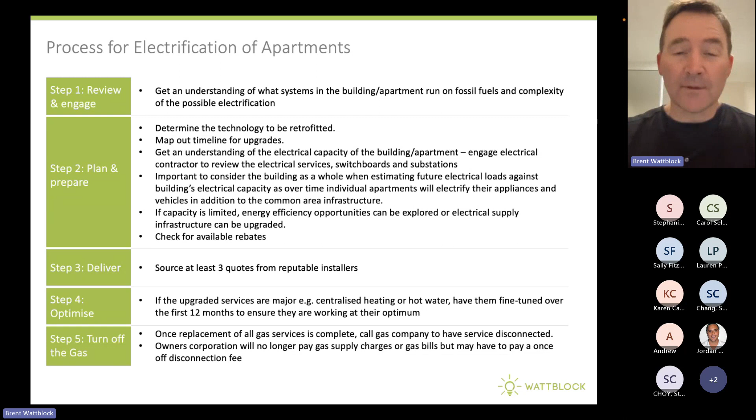So when it comes to delivery, you want 3 quotes from reputable installers. After you've installed the new technology that will reduce your gas or fossil fuel reliance, you have an optimization process - we'll come back to that, a bit of a fine-tuning process - and then finally turning off gas and disconnecting gas, either from your own apartment or, in the best example, from the entire apartment building.

One of the things we just have to understand as we embark on this journey is the difference between individual lot property and common property. Here's a diagram we've reused from Bannerman's Lawyers, a North Sydney-based strata law firm. It gives an indication as to what items are individual lot property and what are common property, and probably the one that's most confusing when we try to electrify our apartment buildings is hot water.

Hot water could be a centralized service which can't be upgraded by the individual apartment owner on their own. But in some townhouses or older apartment buildings from the 60s or 70s, you might have your own hot water service or hot water tank for your own apartment or lot. So you can fully embrace decarbonisation and electrification in those buildings.

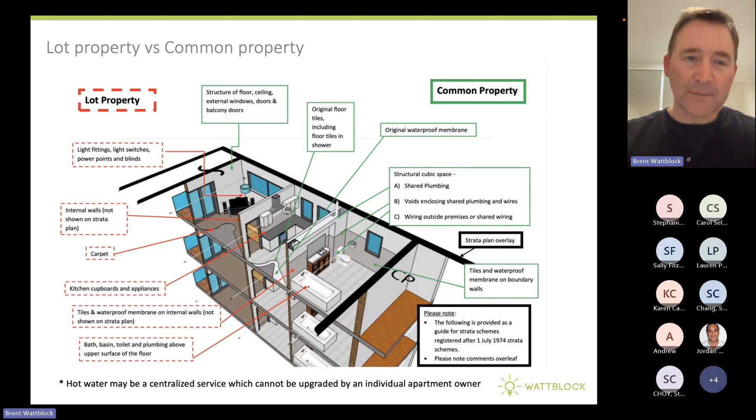So the first thing is to understand, for your own building, the difference between individual lot property and common property. And if you're in a more modern apartment building, find out whether you've got a hot water meter - that would give you an indication as to whether you've got a centralised hot water service and whether the hot water is individually metered.

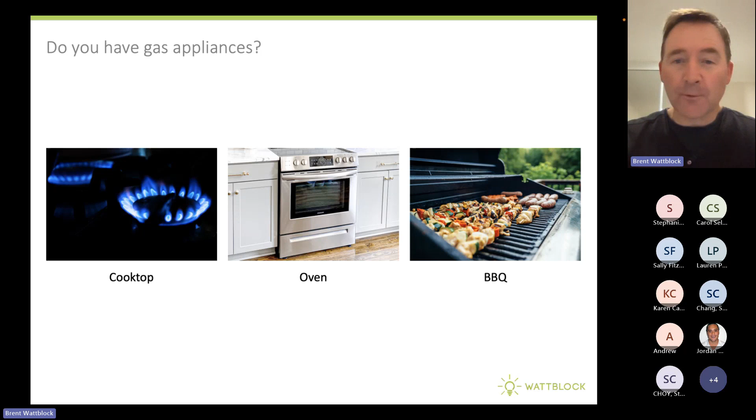Now the next thing: inside our apartment, do we have gas appliances? Do we have gas cooktops? Do we have gas ovens? Do we have bayonets on our balconies where we're connecting up gas barbecues? So the first thing is an audit of your internal apartment - we've got to find out where these gas items are. And probably the one that is of most interest, and people have the most control over, is moving to an induction cooktop.

Now, there's a wide range of induction cooktops that you can install into your apartment building. They can range from $600 to $2,200, but maybe there's a luxury model that's even $8,000. Now the thing you've just got to be cognizant of if you're moving to an induction cooktop is the amperage that is used by the induction cooktop.

That could be somewhere in the range of 20 amps to 48 amps. In some apartment buildings in the North Sydney area, we've actually come across some really old apartments that have a limit of like 16 amps for the entire apartment. In those buildings, at the moment, until a supply upgrade is done to the building, you wouldn't be able to retrofit even a normal electric cooktop, let alone an induction cooktop.

But in other buildings that are a bit more modern, you might have a 63 amp single phase meter for your apartment, and you could comfortably handle a 20 amp induction cooktop.

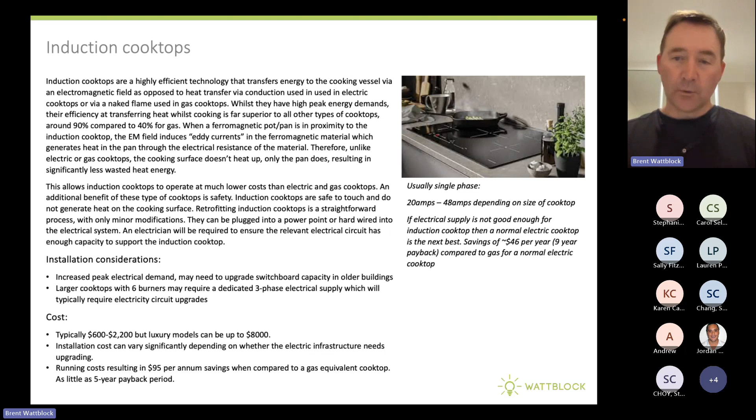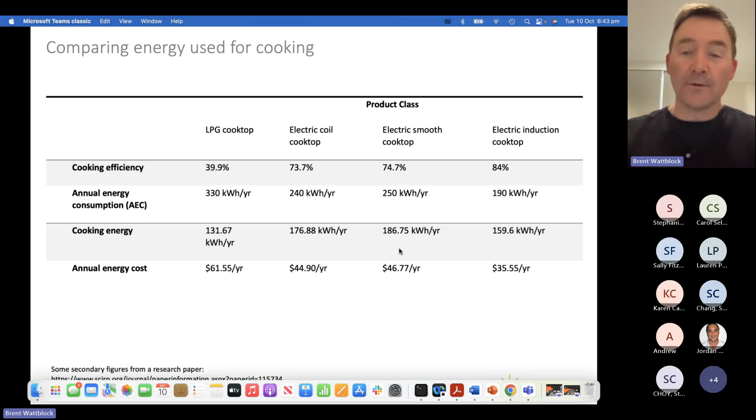So just to give you a little bit more detail on the savings you might get and the relative efficiency of different cooktops: on one end we've got LPG at 39.9% efficient. As we move through, electric coil cooktops are 73.7%, electric smooth cooktop is 74%, and then the best efficiency is electric induction cooktop. You can do all your cooking for an entire year for about $35 with one of those.

Now the next thing is, do you have gas heating or not? The presence of a gas bayonet, say on the inside of the apartment somewhere, is the indicator of whether you actually have the ability to use a gas heater today or not. Not every apartment has a gas bayonet - in fact, some of our older buildings don't have gas connected to the individual apartments at all. But probably the buildings built from the 1990s onwards, at least until about five years ago, a lot of those have gas bayonets, and people have the option of doing gas heating.

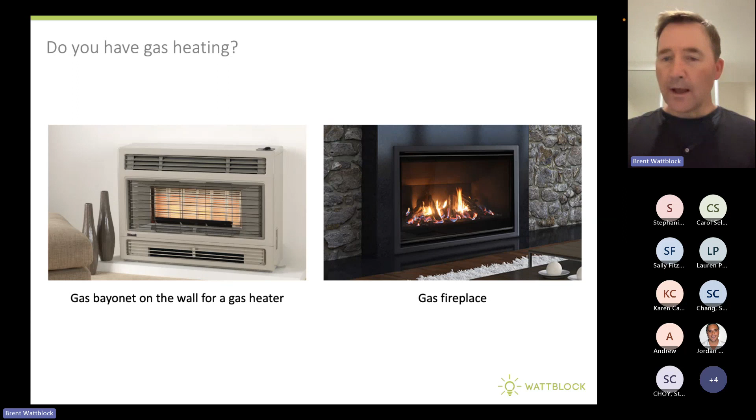Now the thing we want to bring out tonight is that reverse cycle air conditioning is the electrified method of heating your apartment. While reverse cycle air conditioners use electricity, they're actually a very efficient way to heat an apartment. So if you were someone that had a gas heater and you were using a gas bayonet, it's actually more efficient to get rid of that gas heater and install a reverse cycle air conditioner, using the heating mode to heat your apartment - that's because reverse cycle air conditioners are a form of heat pump.

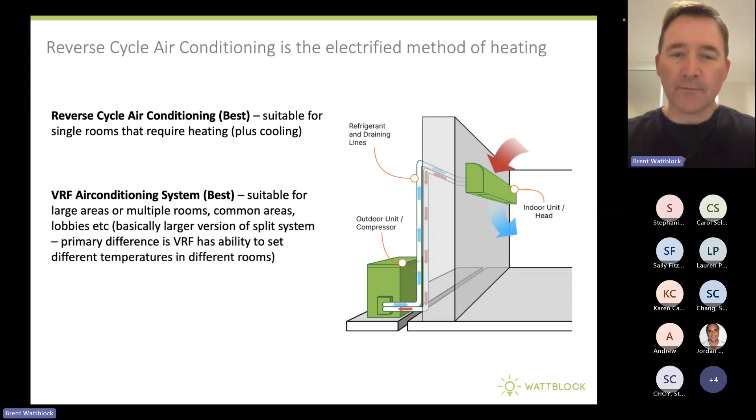And we'll come back and talk a bit more about heat pumps later on. Now, the next thing as we're auditing our apartments is, do you have gas hot water for your individual apartment that is just dedicated to your own unit?

To find this out, you might see one of these instant gas systems strapped to the side of the building, typically outside one of the windows of your apartment, or potentially on your balcony. Or if you're a ground floor apartment or more of a townhouse complex, you might find your gas hot water storage tank at ground level.

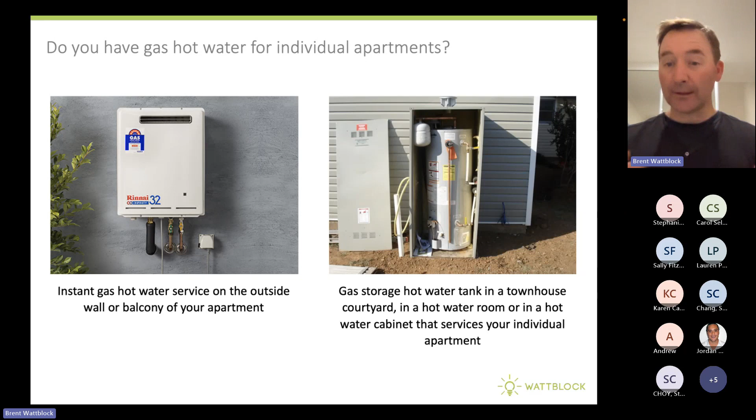The heat pump and the reverse cycle air conditioner are efficient, and they are the electrified version that we want to be moving to in the future as we electrify our apartment buildings.

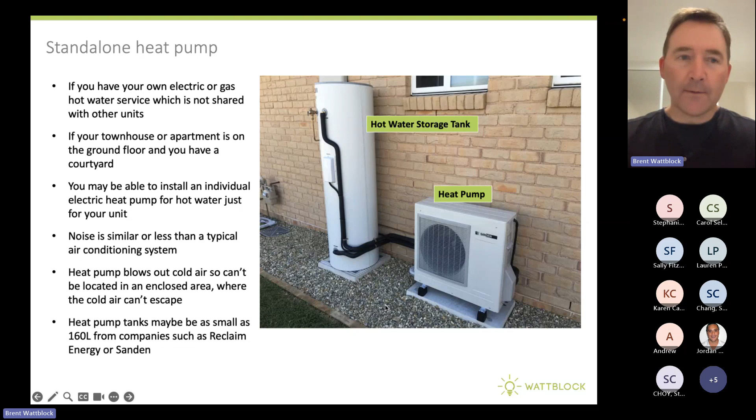Now, if you have this standalone hot water setup, you're in a townhouse or another older apartment building that has a ventilated hot water system, or a hot water system that you can ventilate. Maybe it's in a stairwell that's not inside your own apartment, or not underneath the sink or in an enclosed cabinet. These are some of the savings that you can actually get.

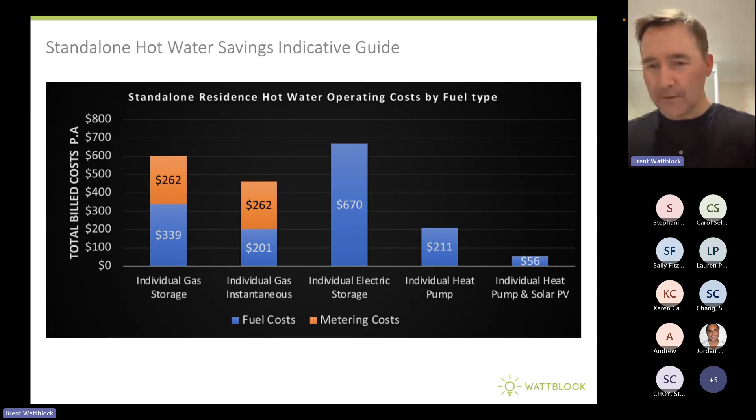You can see the individual heat pump is much more efficient just on its own because it's using the ambient air temperature, sucking that in, and you're getting free heating of the hot water just from the heat island effect of North Sydney. And also, you're not paying daily connection fees to the gas distribution network. So you're saving on metering costs, and you're also saving on the energy that's used to heat the water.

So we want, if we've got common hot water systems that are gas today, we want those to move to electric heat pumps. We want pools that are heated by gas heating systems today to be moved to electric heat pumps. We want to get the solar panels onto the roof. We want to get the batteries into the building.

And of course, another fossil fuel is the petrol that's going into our internal combustion engine vehicles. And we want to be upgrading that as we upgrade our cars, so that we move to using electric vehicles, and we have EV charging in our apartment buildings that allows us to charge the electric vehicles.

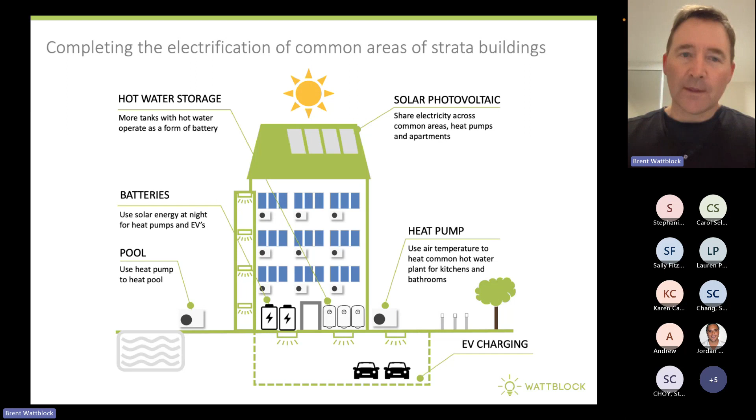Just to compare that with our standalone houses, they're at about 37% penetration at this point in time. So you can see that strata's still got a long way to go to catch up and electrify when it comes to the head start that standalone houses have. But batteries are still fairly early, heat pumps still fairly early in the piece when it comes to our apartment buildings, but we're going to see more of them coming into the market over the coming decade.

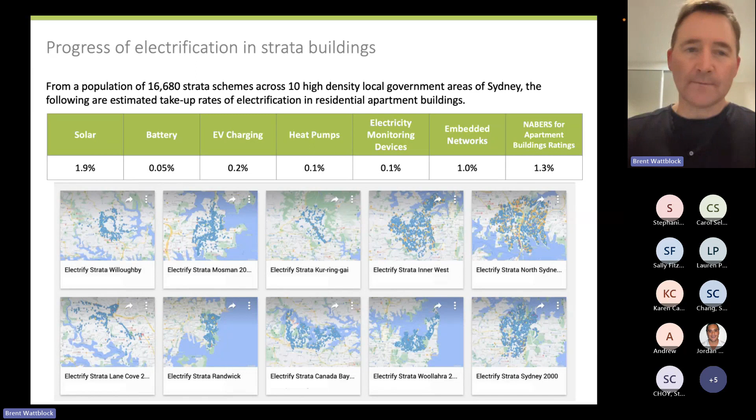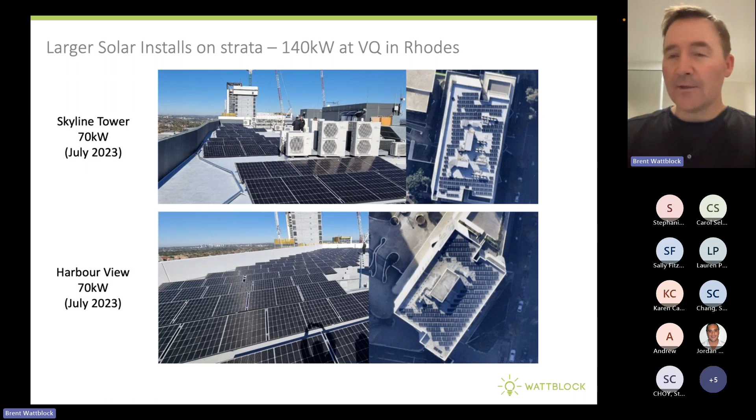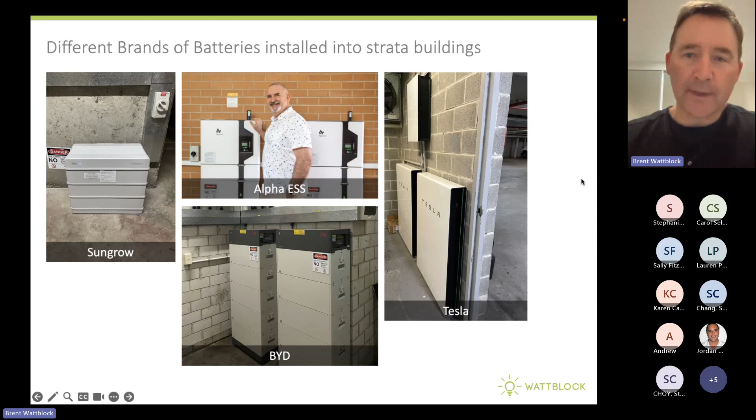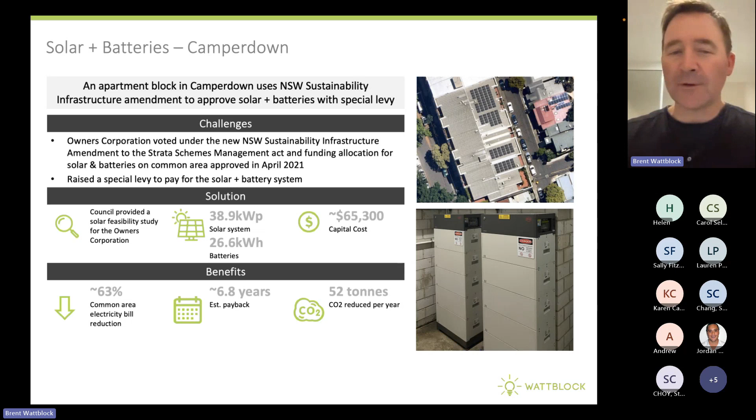Here's a case study from Camperdown, and what's interesting about the electrification journey of this particular strata scheme is how they financed doing solar and batteries for their apartment building. They actually went out and raised a special levy to finance a 38 kilowatt solar system with 26.6 kilowatt hour batteries. For a combined solar and battery project, just for the common areas of the building, we're looking at about 6.8 years payback on that case study.

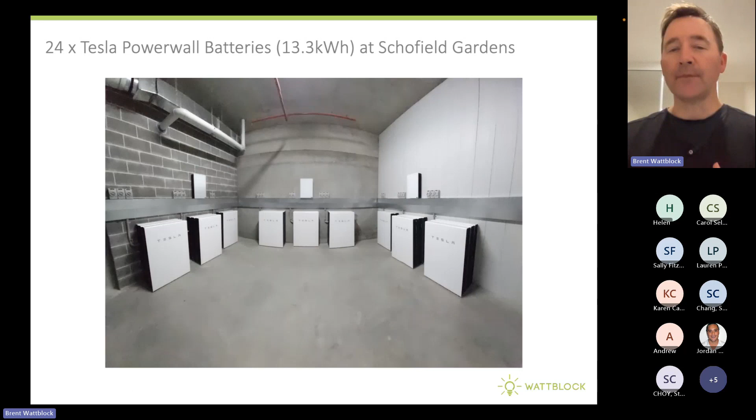Now, this is another example from Greater Sydney, where this strata complex has 24 Tesla Powerwall batteries in one room. They're actually installed in a domino effect, 3 deep against the wall. This is an example of implementing a larger amount of battery storage into a strata complex.

Now, we should mention an innovation from a company called Allume Energy, that came out of Melbourne University about 7 years ago. They've created this solar sharing system. You can see these white boxes here that are called the Solshare.

This is a technology that allows you to install a single solar system on the rooftop of an apartment building and then connect that solar system into 15 apartments for each of these white boxes. So this building here has 17 apartments, so they've got 2 of the sharing boxes so that solar can be shared into each of the individual apartments in that particular strata complex. You can see 2 inverters there as well.

So we've now got technologies. We've seen buildings in Sydney install up to 4 of these. So apartment buildings with up to 60 units have bought 4 of these boxes and shared solar power into the individual apartments to help with further electrification of the individual apartments.

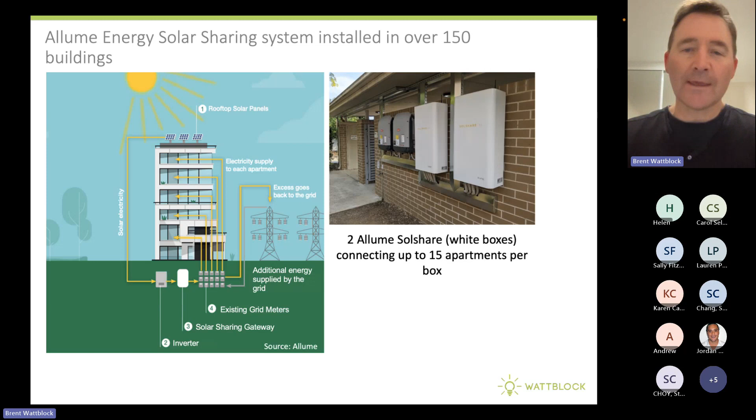If we move out to the Northern Beaches, there's a little case study here of the Edgewater building, 32 lots. This building actually has 2 solar systems on the roof. One is for the common areas of the building, and the other is for solar sharing into the apartments. But the solar sharing is on a user pays opt-in basis, and just 22 out of the 32 lots decided to pay for a share of the solar system that would connect into their private apartment meter.

They also had 2 levels of buy-in. Each of those 22 apartments could either buy a 1.5 kilowatt share or a 2.5 kilowatt share of the shared solar system that connects into the individual apartments.

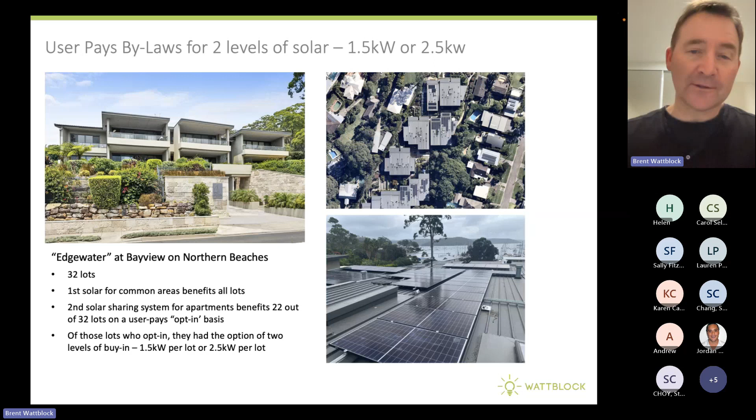So now we're going to talk a bit more about heat pumps. We had a look at them in the context of, say, a townhouse earlier, where you might use a heat pump for creating hot water for an individual townhouse at ground level. Now let's just dig into the concept of a heat pump a little bit more.

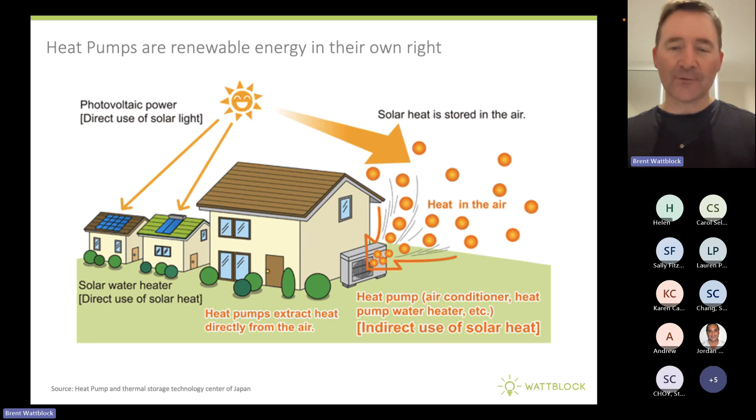A heat pump is different from solar panels, which create electricity, but you can have both solar panels and a heat pump operating in tandem to get the lowest cost hot water, because heat pumps use some electricity, and if you reduce the cost of electricity by installing a solar system, you're getting to the cheapest hot water.

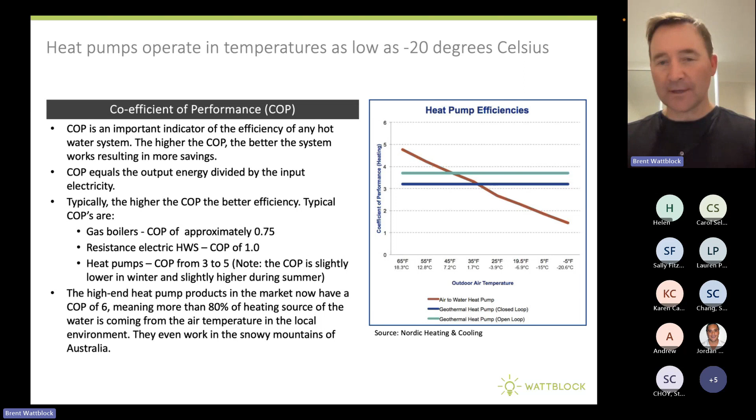So when we talk about heat pumps, we quite often talk about something called the coefficient of performance, or COP. To give you an idea, gas boilers might have a COP of 0.75, and now there are some heat pumps on the market that have a COP of 6. So what that means is more than 80% of the heat for heating the water is coming from that air temperature being captured, and it's much more efficient.

Now, in New South Wales, we've got a gas distribution monopoly. It's called Jemena. The company Jemena is owned by the State Grid of China and Singapore Power. Gas distribution is a monopoly in strata in New South Wales. However, if we switch to electric heat pumps, then we can actually move off that gas distribution monopoly, and we're not paying a high flagfall for metering charges when we move off that gas distribution network.

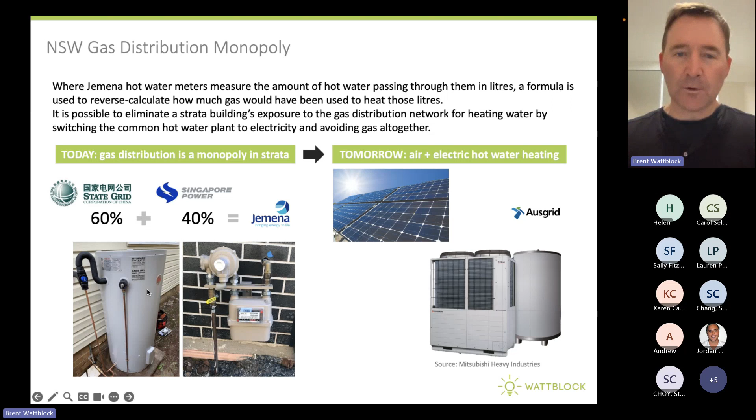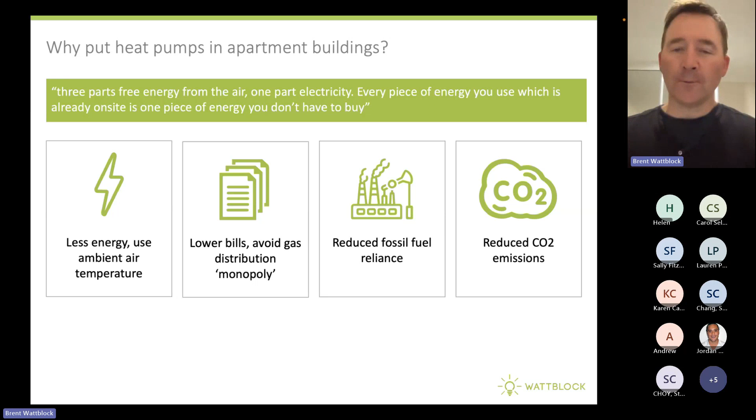So why would you put heat pumps into apartment buildings? Basically, you're getting some free energy. You're capturing that from the air temperature. You're lowering your bills, you're reducing your fossil fuel reliance, and you're reducing carbon emissions.

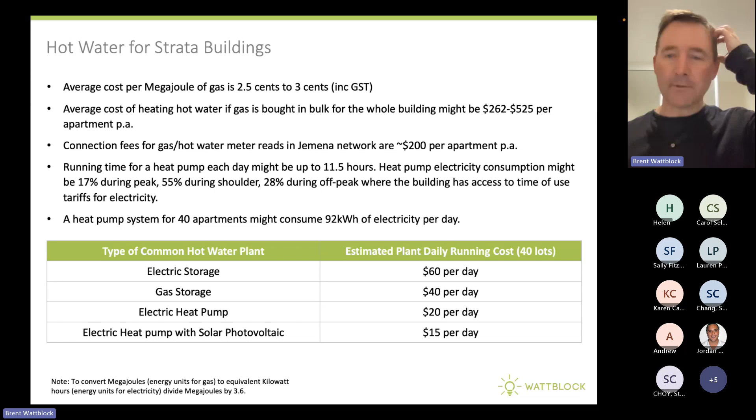Just to give people a bit of an idea, say you've got a common hot water plant for your apartment building. If that common hot water plant was based around electric storage technology and there were 40 units in the building, you'd pay about $60 of electricity a day. If you used a gas storage hot water system, you'd be paying about $40 a day for hot water across 40 apartments. With an electric heat pump, you'd be paying about $20 a day. And if you had an electric heat pump with solar PV, you'd be down to about $15 a day.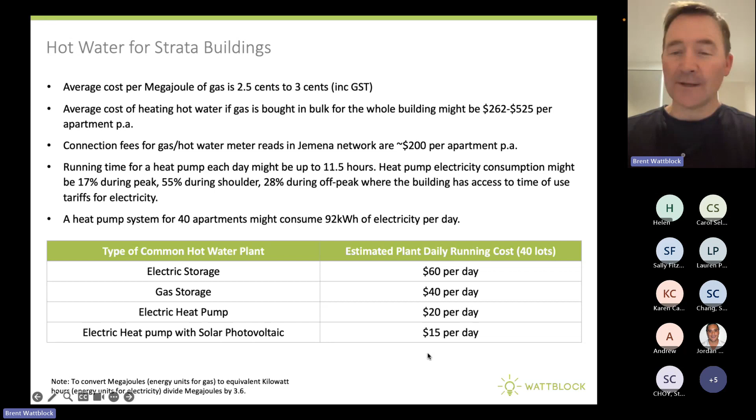This chart here just shows whatever your setup of common hot water inside an apartment building, whether it's one of these, we want to try and get to these target ones down here. To give you a gauge as to how much you'll pay for hot water for an entire year inside a single apartment: with a heat pump, you can get it down to $180, or with heat pump and solar, potentially as low as $140 to heat all your hot water for an entire year.

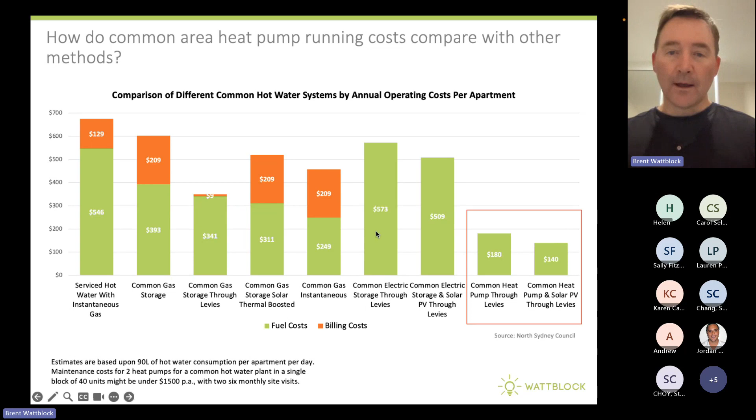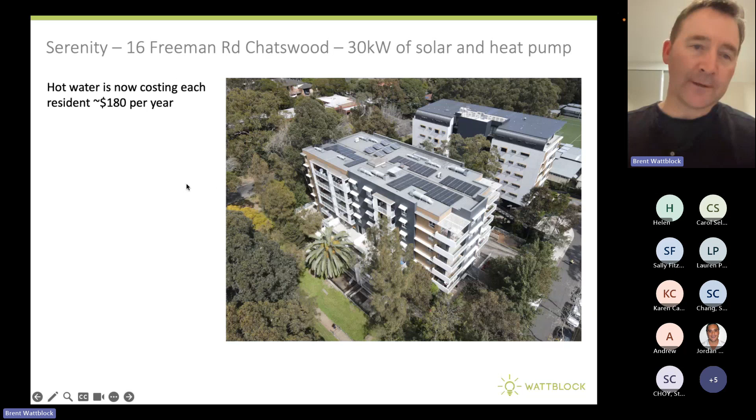So if we want to see a good case study, a fantastic one is done by Brian Peck up at 16 Freeman Road in Chatswood. This is a strata building that retrofitted a 30 kilowatt solar system on the roof, and they also put a heat pump in. We'll have a look at that in a second. They've got hot water down to $180 per year for each of the 44 apartments.

So this is the heat pump, a Mitsubishi Q-Ton heat pump that's outside the hot water room. And inside the hot water room, you've got these storage tanks storing up the hot water to use. They don't run the heat pump between midnight and dawn, so there's no noise from the heat pump during that time.

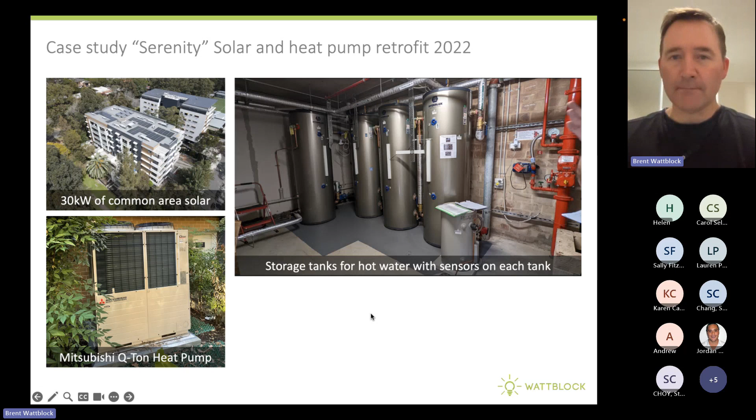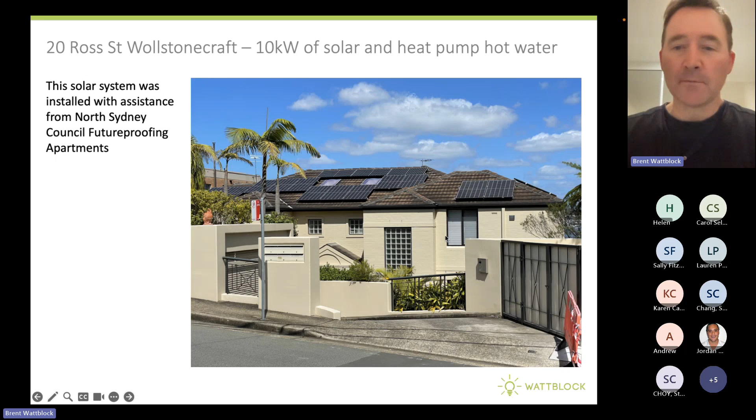If we move a little bit closer, in North Sydney this is a building that came through the Future Proofing Apartments program that North Sydney Council's been running. It's a smaller apartment building with just 5 lots in it, but they put a 10 kilowatt solar system in, and they put Reclaim Energy heat pumps in, and they've electrified this apartment building of 5 apartments.

And if we just jump over to Glebe, here's 2 blocks of 24 apartments, and they've retrofitted solar panels onto the rooftops of those 2 buildings. They put 4 Reclaim Energy heat pumps, and they've got 5 hot water storage tanks in there. So they've completely electrified this apartment building and disconnected gas, where this used to have a gas hot water boiler.

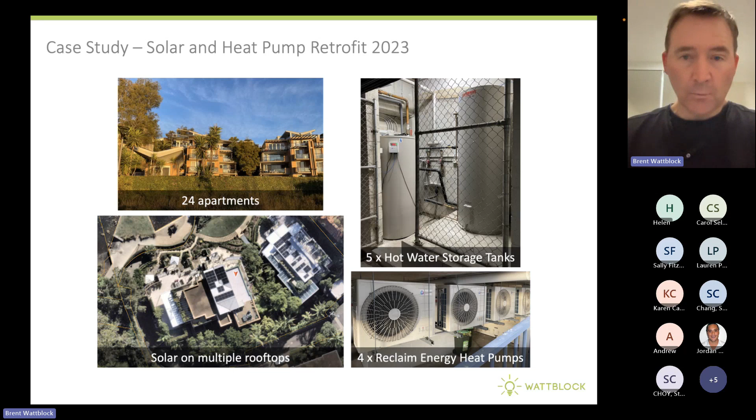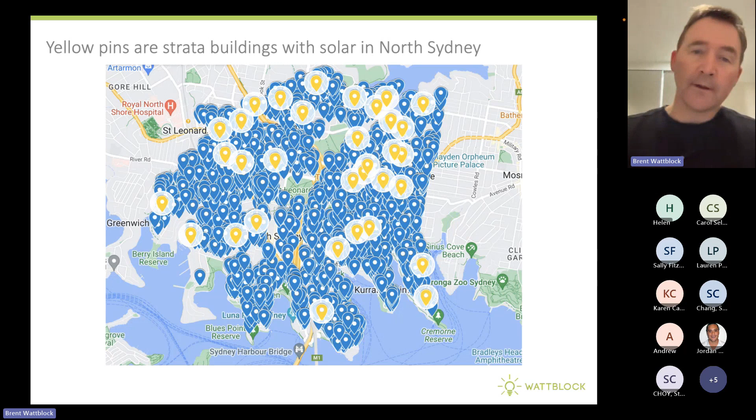Now, just to give you a little bit of an idea as to how we're progressing, there are about 2,200 strata buildings in the North Sydney area. They're shown by the blue dots on this screen, and the yellow dots are the strata buildings in North Sydney that have implemented solar on those strata buildings, probably about 34 that we're aware of that have now got solar installed.

Now, we'll just point out a problem when you try and transition a common hot water system from gas to electric. We're dubbing this robo-gas. And this has happened to a couple of apartment buildings, early adopters in the North Sydney area. For example, 24 Yeo Street in Neutral Bay was one example.

After retrofitting out, getting rid of the gas hot water storage system and implementing a heat pump, the gas distribution network wants to keep billing people inside that strata building for the gas that they're no longer using.

Also, some of these buildings are getting quoted high amounts for disconnecting hot water meters - it might be $165 per apartment to disconnect a hot water meter. And if you've moved your common gas hot water to electric heat pump, and inside your own apartment moved to an induction cooktop and want to get rid of your old gas meter for your individual apartment, some people have been quoted like $2,000 for removal of that gas meter that you no longer need.

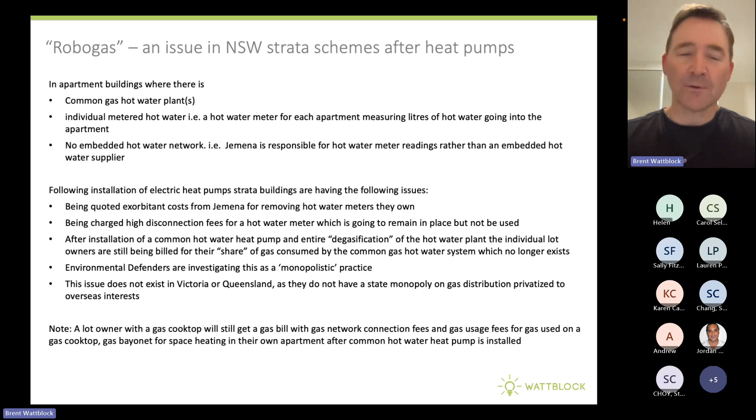Now we'll talk a bit about EVs. We're crossing into some of the tipping points. For a while it's been cheaper to run an EV than run an internal combustion engine vehicle, but we're also getting close now to the point where it's going to be cheaper to buy some EVs. In particular, you'll see some EVs from companies like BYD coming into the market that are really competitive with their internal combustion engine counterparts.

So let's have a look at another case study of an apartment building. This time it's over the harbour in the city of Sydney, at Rhodes House in Camperdown, on Parramatta Road. This is an apartment building that's set up electric vehicle charging backbone such that any vehicle in the car park area in this building can install an EV charge point. They've got all the backbone infrastructure in place.

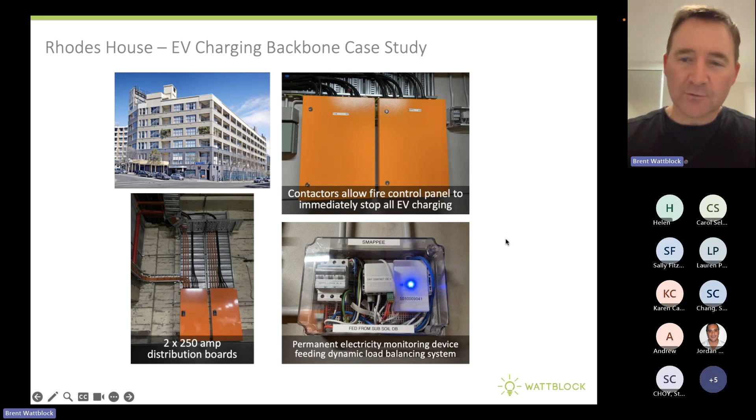That means there are contactors that connect to the fire control panel that allow all EV charging to be stopped in the event of a fire. There are new distribution boards in the car park area, a permanent electricity monitoring device, and 9 new subboards throughout the car park area. There are flat cables running along the roof behind the car spaces, and you can chop into one of these and install your charge point when you're ready behind your own individual lot car parking space. Then they've got a shared fast charger, a DC fast charger, out in the visitor car parking area.

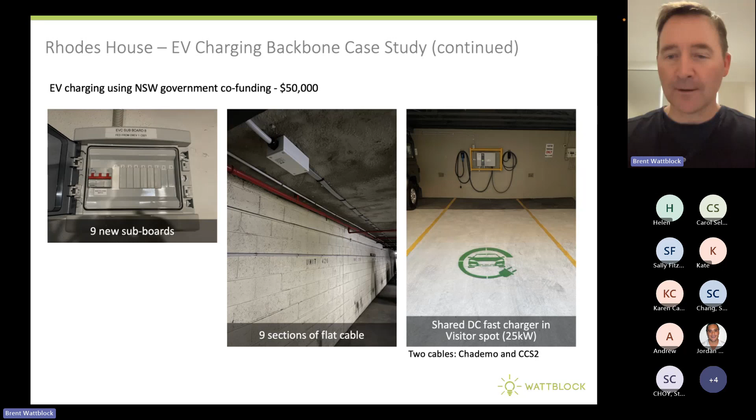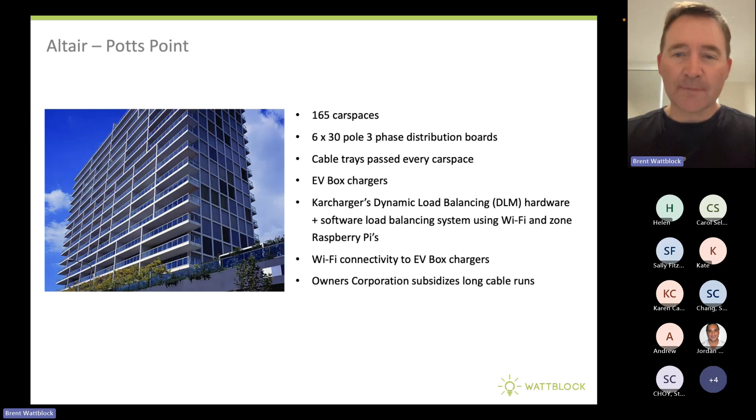This is another building that's electrified with electric vehicles - the Altair at Potts Point. 165 car spaces are enabled for EV charging in this building. They've got dynamic load balancing equipment and Wi-Fi connectivity for all the EV charging. This is an example of an EV charge point on a pylon. They've got new cable trays that allow you to run cables back to the distribution boards, and in the main switch room, you've got this dynamic load balancing equipment.

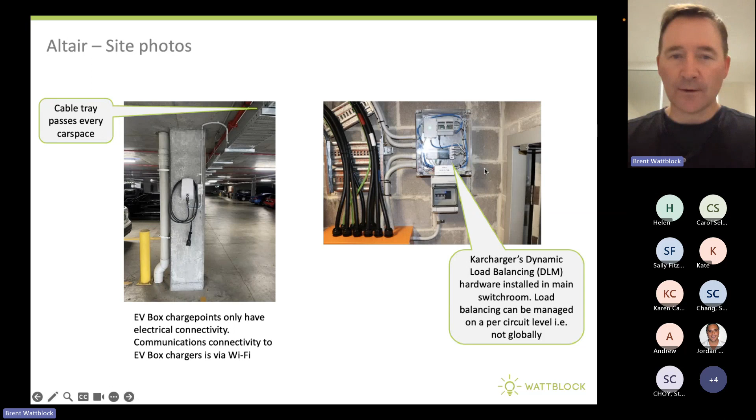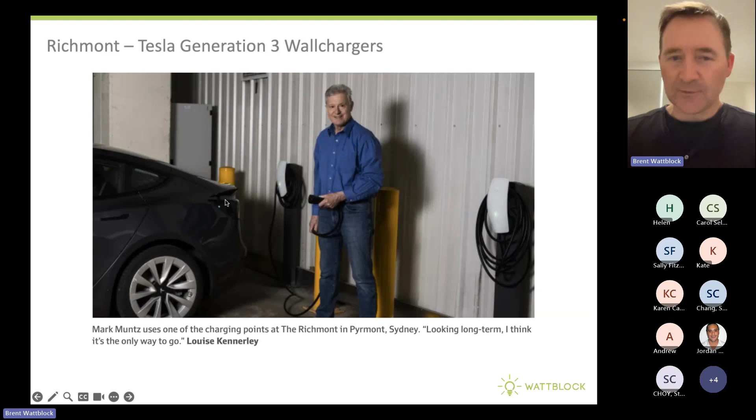This is another example of EV charging backbone - the Richmont building in Pyrmont. Again, 106 car spaces are able to set up EV charging, and they've also installed EV charge points in all 12 of their visitor car spaces. This is one of the owners charging his vehicle from one of the shared EV charge points in the visitor car parking. These are new distribution boards and new network boxes installed on 3 floors of basement car park to enable that. They've got 2 choices of charge point - they can use Jet Charge, ChargeMate, or Tesla Generation 3.

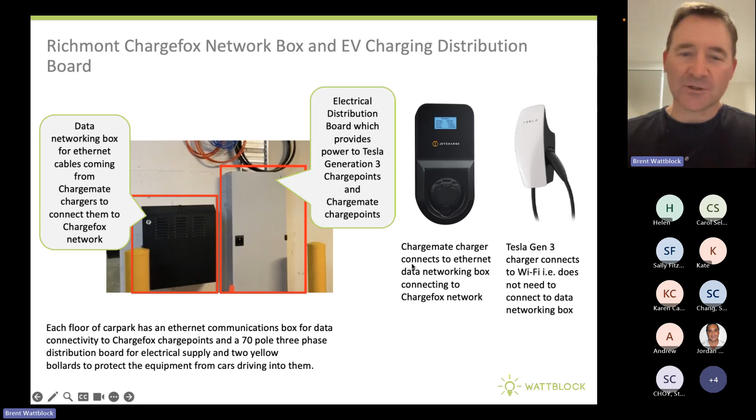A really great example of electrification of transport in a strata building is the Zinc building at Alexandria. They've got solar-powered EV charging in the strata building, with a common area solar system, a solar array on the rooftop. They've installed Tesla charge points throughout the car parking area, and during the day, if there's any excess solar and you try to charge your vehicle, you can actually get solar power into your electric vehicle there.

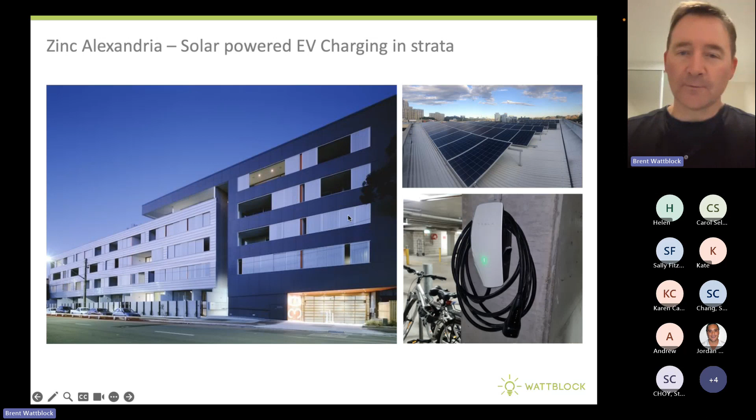Now, we've talked about a wide range of different technologies. You've got to be careful when you're choosing installers for your strata buildings. Make sure that they're accredited, particularly if they're in the solar area. What's their experience like working with strata? Are they a stable company that's been around for several years? And can you talk to some of their other strata customers before they install in your particular strata building? It's very important to get these companies to visit your block and not do remote quoting. A lot of strata buildings run into issues, particularly if a solar installer tries to quote remotely and doesn't get all the data.

You need them to come on the ground in your building and have a look at your setup so that you get accurate quotes that you can trust when you take to your annual general meeting or extraordinary general meeting.

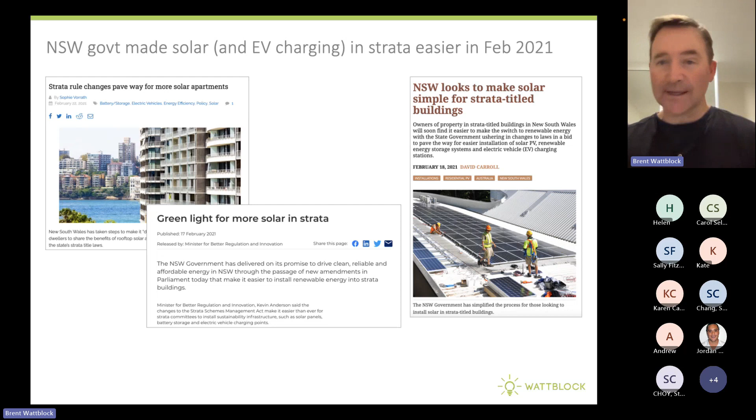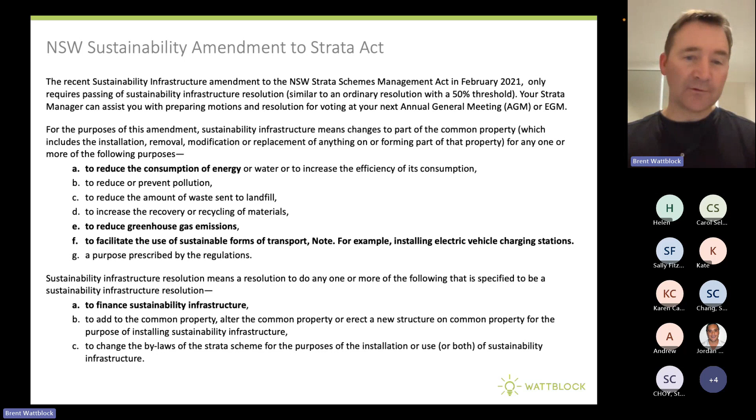For a couple of years now, we've had the New South Wales Government Sustainability Infrastructure Amendment to the New South Wales Strata Schemes Act. That applies to any sustainability upgrade, whether it's reducing energy or water consumption, getting rid of pollution, getting rid of waste, improving recycling, reducing greenhouse gas emissions, or facilitating sustainable transport. It also applies to voting on the method by which a strata finances doing any of the above. So if you're voting on a special levy, on taking out a strata loan, or on taking out a power purchase agreement, you're able to operate at this 50% of unit entitlements threshold. If not more than 50% of those that vote are against it, the motion will carry and you'll be able to proceed with your project.

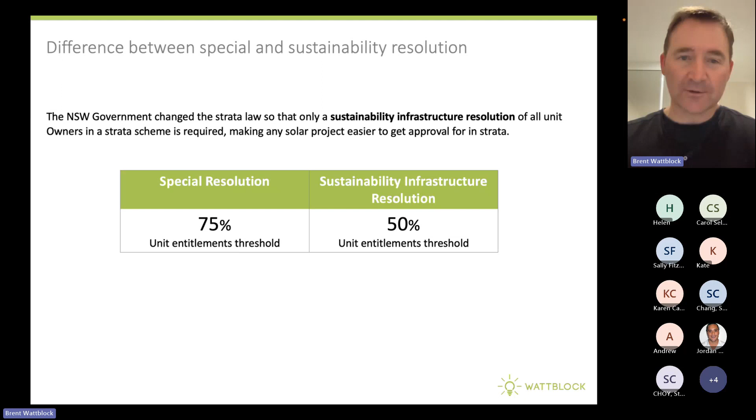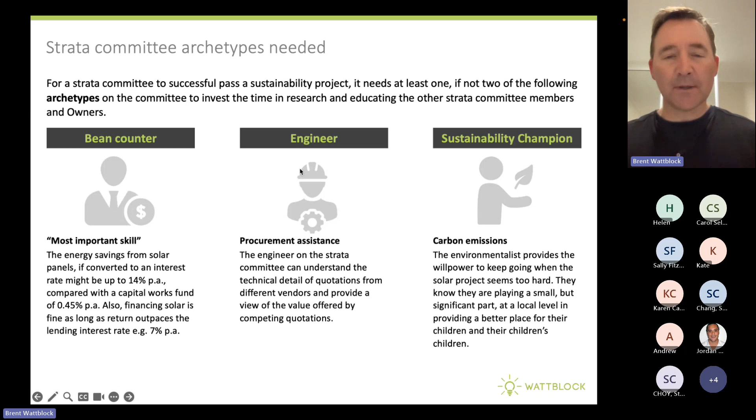One other thing to keep in mind: what are the strata committee archetypes we need to get these electrification projects over the line? We need the bean counter, the engineer, and the sustainability champion—we used to call it the greenie, but now we call it the sustainability champion. It's important to have a balance: someone who can dig into the numbers and look at the return on investment, the payback, and the property valuation uplift, and the engineer to help explain the new technologies to the people in your apartment building.

We've got a little bit of further information here, but I'm now happy to pass back to Jordan, and we can take some questions.